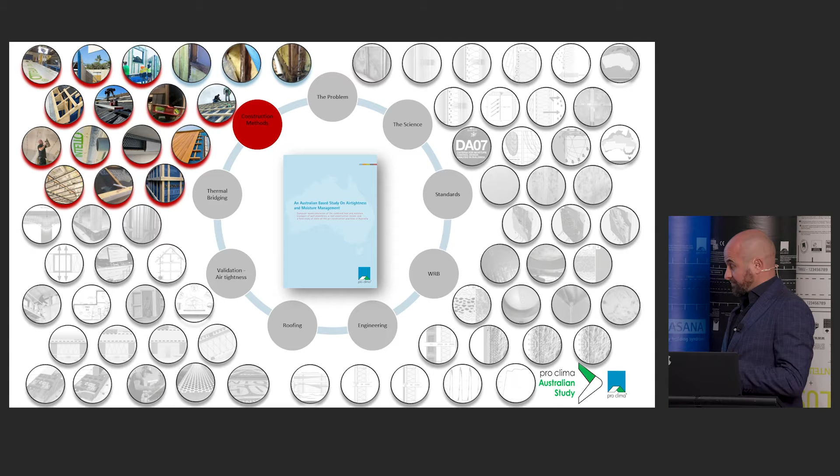It's very important to really understand the why. And the why is not just a single question or a single answer. So as we've now talked about the problems, the science behind the standards, what is a weather-resistive barrier, the engineering behind it, how does it apply in roofing, how important airtightness is, and also the thermal bridging, which is a very small part of the study, but it's also important.

We can talk for hours and hours about the why, but it doesn't help us if we don't know how to execute it, or if you don't have the right people to execute it. So very often we hear, is it even possible? It won't happen on site. The idea of the rest of the presentation is actually to prove that this is happening on site already, for many, many years, and that's the good part. All these following pictures, most of them are from social media, from premium builders. A few of them are here tonight, and you're going to see what they're actually doing out there.

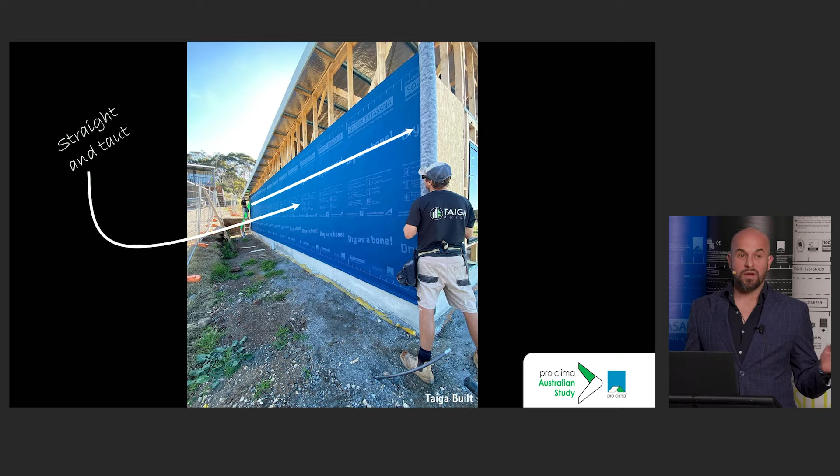To follow the line of how you build a house, I'd say we start with walls. And as we said before, if you use a quality product or a quality wall membrane, you just run the wall membrane and it should be right, isn't it? If you install it nice and taut. Because the quality of the membrane is actually what you need.

So job done. Or if you look a little bit more into the detail, we've actually fixed things because we have to hold the membrane in place. So in the first 10 seconds, you already start to penetrate the membrane. You actually have to consider what's happening with all the staples in the membrane. So if you have wind pressure on the membrane, you stress the staple connection.

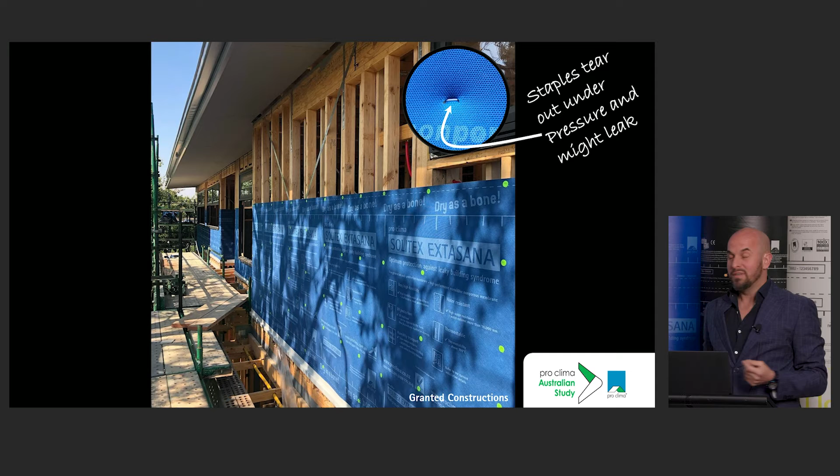So is this the best result? How do you fix your membranes? A better way is definitely using stinger washers. But still you penetrate the membrane. So every penetration is a potential hole under some conditions.

And the same is with brick ties. If you have brick ties specifically, they have these sharp corners. They would easily just penetrate the membrane over time because you have the wind pressure, positive and negative. That's why you see we have the Naideck tape, butyl tape, in behind to protect the membrane.

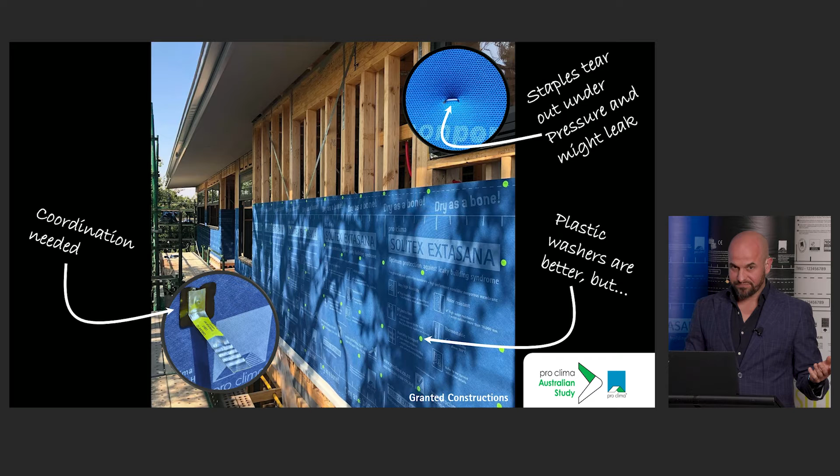I definitely would say there's a better way to install it. The idea is just to simplify it. Just put battens on top.

And as you know, thanks to Jesse now, we actually always want a drained and ventilated system on the roof and on the wall. It also has the benefit of supporting the structure and strengthening it. Because when you have wind pressure hitting the membrane, that creates stress on the membrane. So you don't want the staples to handle the stress, you actually want the battens to handle the stress. If you have brick ties, just fix in front of it and you don't have all the problems with sharp corners.

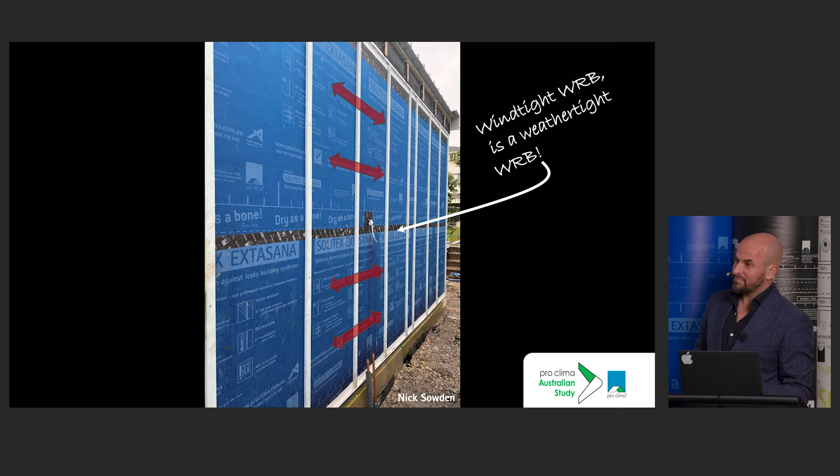So as we now know, we actually want to support the membrane. You also need a drainage layer, because if water gets behind the cladding, or if you have condensation, you need a drainage layer. But you just need 2 millimeters for a proper drainage layer, because that's all you need to break the surface tension of the drop. But 2 millimeters is not a lot, maybe you fold up a newspaper 3 times and you've got your 2 millimeters. So it doesn't sound quite right to me.

So it's not just all about drainage, it's also about ventilation. And to actually create a proper ventilation layer, you need something around 20 millimeters to allow free airflow.

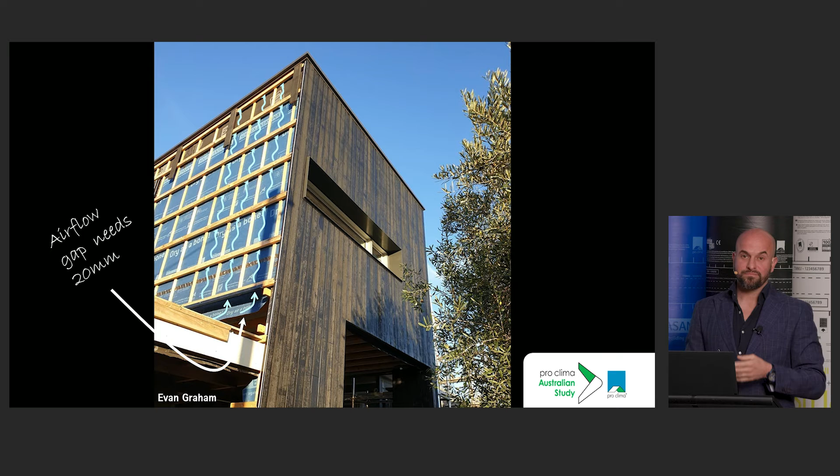So let's talk about ventilation in walls. An important part is, first, air has to get in. Where air gets in, water will get out, of course. So it means you need a proper opening on the bottom. Based on a study from BRANZ and Lund University, they actually want to have at least 10,000 millimeters square per linear meter.

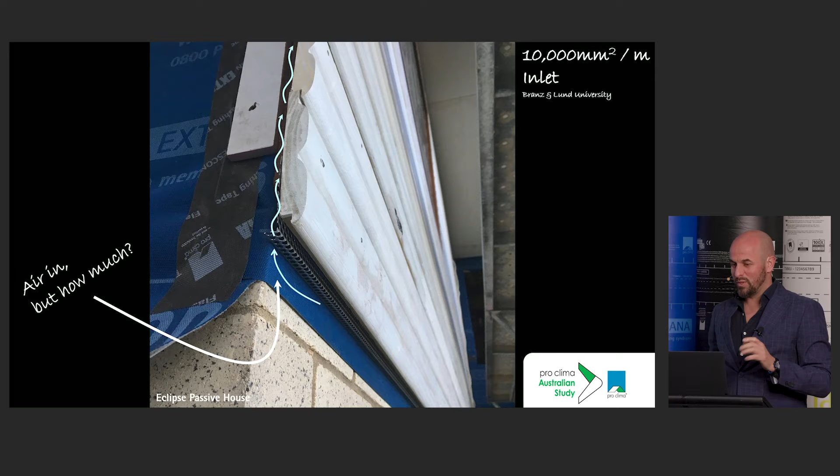But this is actually just 10 millimeters, isn't it? And just before that, 20 millimeters. It doesn't add up, that's weird. Let's have a look why. The thing is, if air gets in, air has to get out too. So again, we want at least 10,000 millimeters square per linear meter for air to escape.

The opening will change again if you go into bushfire zones, because then the mesh has to get finer, since the opening rate should be less than 2 millimeters. But you still have the same system.

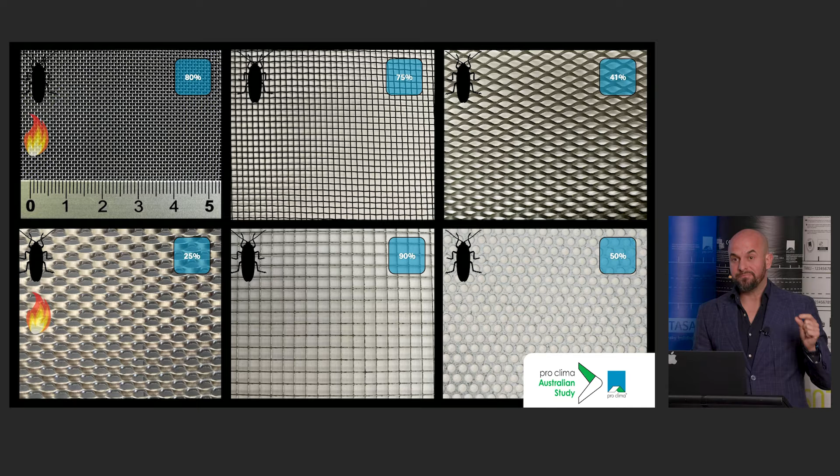One way to do it is using the flexible mesh. The tricky part is that the mesh is flexible, and the membrane behind is flexible too, so you might end up with a gap.

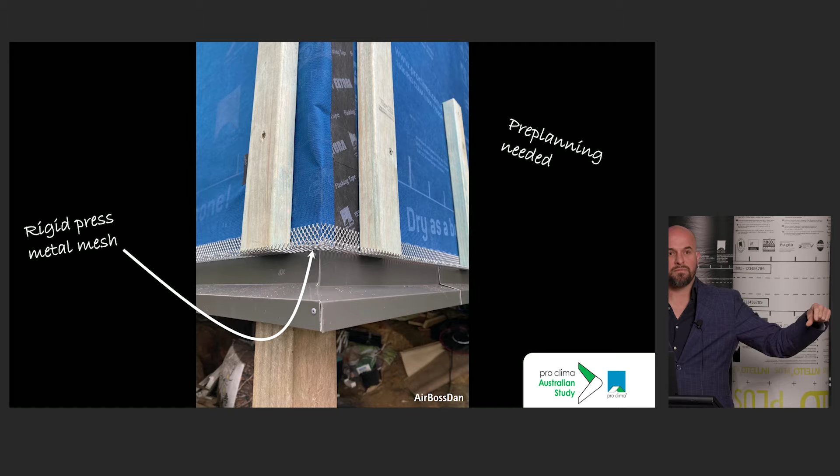I think the better version is actually a rigid, banded, custom-made cavity closer. If you have fire requirements, you just put a thin strip of fine mesh inside, but you still have something rigid. I think this is going to be significantly more durable than a flexible membrane.

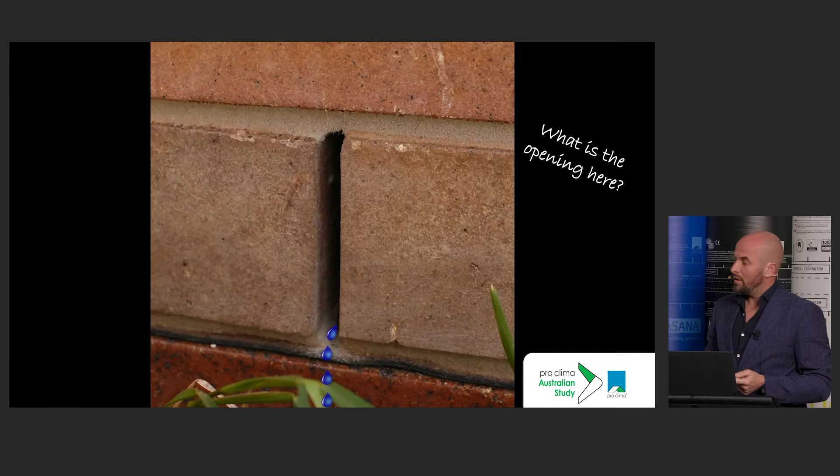Having a drained and ventilated system isn't just important for systems with cladding on the outside, it's also important for brick veneers. With brick veneers we just care about the weep holes, but don't even consider ventilation. I think it's actually important to have proper ventilation, not just drainage.

So we have to look into the detail to see what the actual opening rate is. I'll try to calculate the opening rate of one weep hole, which is roughly 760 millimeters square per linear meter, which is roughly just a thirteenth of what we want if you have weep holes every fourth brick, which is standard.

So if you introduced weep holes in every single brick, you'd still be quite far from a proper ventilated area of 10,000 millimeters. You'd only end up with roughly a third of it. So maybe the only way to achieve this is introducing ventibricks.

Quick picture, yeah.

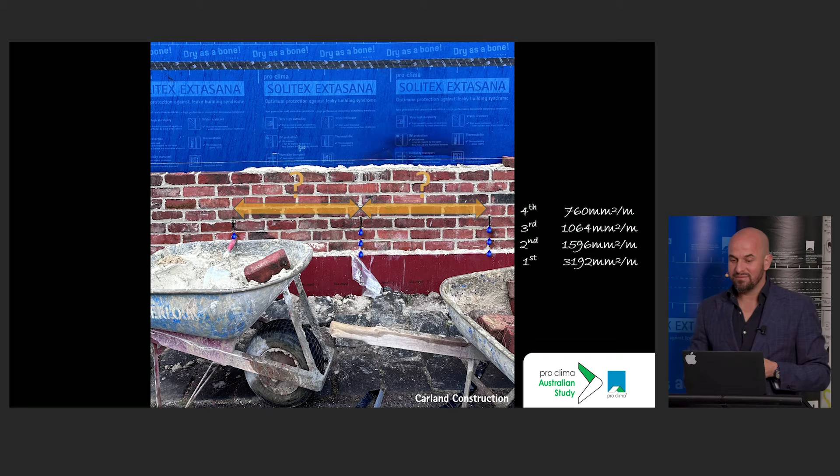What's happening with wind pressure is what we want to talk about, because it doesn't matter if you have a brick veneer building or a standard build with timber cladding or FC sheets, you always have wind hitting the building - we just have to look outside the window today. But what's happening with the wind? Do the bricks hold the wind back, or is the wind pressure actually being held back by the membrane? It's actually the membrane, so the membrane has to live with all the stress.

What's happening when we go into high wind zones up north? This building is in Ballina, for example, so they have really massive wind loads. In this case, you might need a solid board because you actually need to distribute the stress and power of the wind. In this case, you'd also introduce a peel and stick membrane, because this makes the system significantly stronger. In this particular case, it's also an airtight layer.

So they have 90 millimeters of insulation between the studs. Now the important part is they have an additional 60 millimeters on the studs, because now the airtight layer is relatively in the middle. But this only works with the hydrothermal analysis using WUFI.

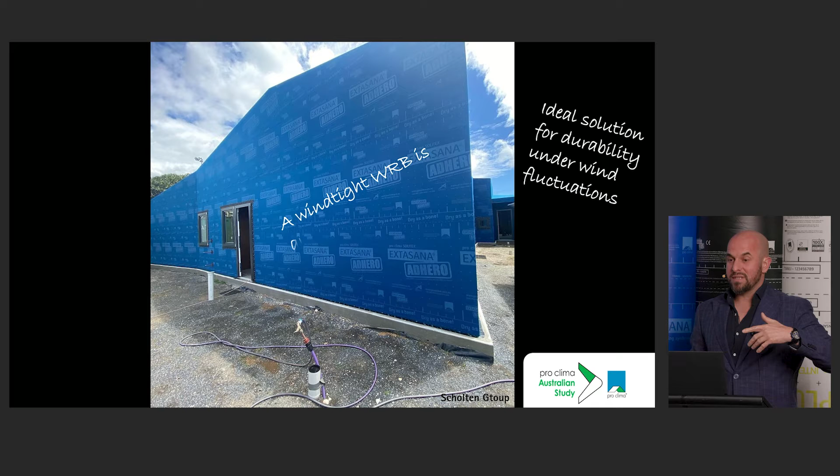Also, using peel and stick membranes, a positive side effect is you always get very good airtightness. I think that might be the best airtightness result we have so far in Australia, with 0.08. I think it's pretty good.

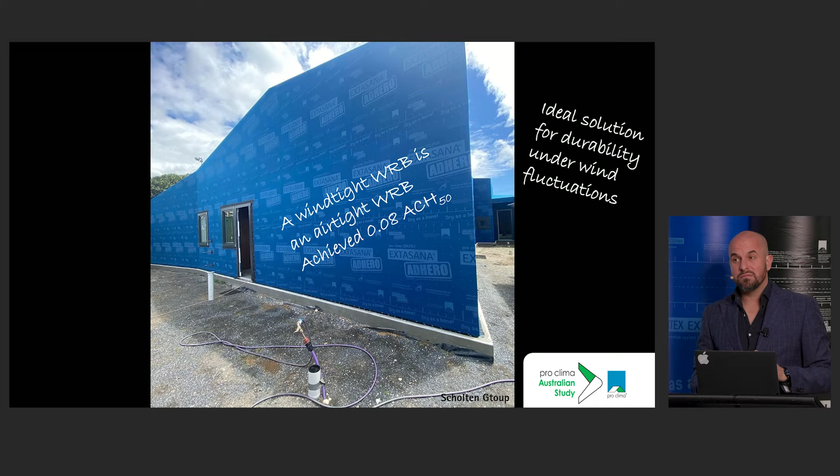I think it's a very good system for walls, and I guess also for roofs, because for roofs we know you have the bracing strips which might penetrate the membrane. So having a sheeting board on the roof with the peel and stick membrane, the bracing of the roof is definitely superior. And it's much safer to work on too.

But whenever you use solid boards, having this drained layer is significantly more important than normal, because you don't have any flexibility - so you can't hope to have accidental drainage layers.

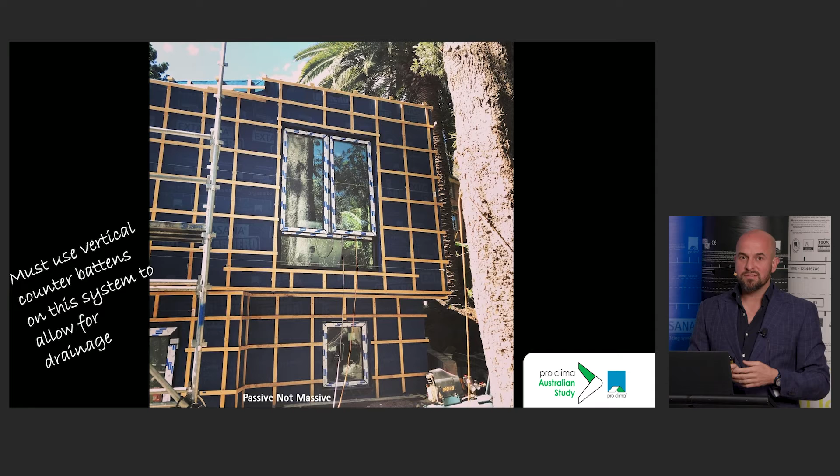The wall wrap is always perfect if you try hard, or the wall membrane is just as perfect until you start penetrating it. One of the most common penetrations are actually cables.

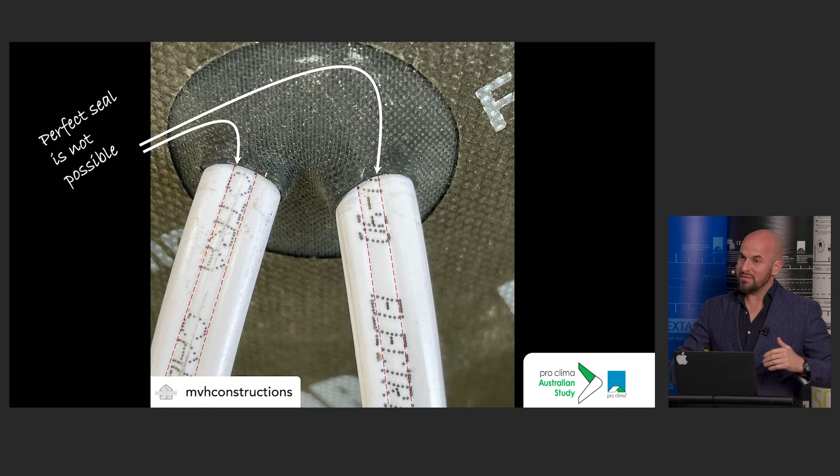So we have these nice grommets for cables. The only tricky part is that in Australia and New Zealand we have flat cables, while the rest of the world has round cables. These grommets are actually made for round cables, so if you look into detail, you can see the corrugations of the cables. It's going to be very hard to stick the tape in between, so getting 100% seal on this system is definitely not possible.

One step better is actually using taped systems, but you have to be very careful and passionate about sticking the tape properly together, because you always stress the tape a little bit. So I still wouldn't say that's the best solution we have.

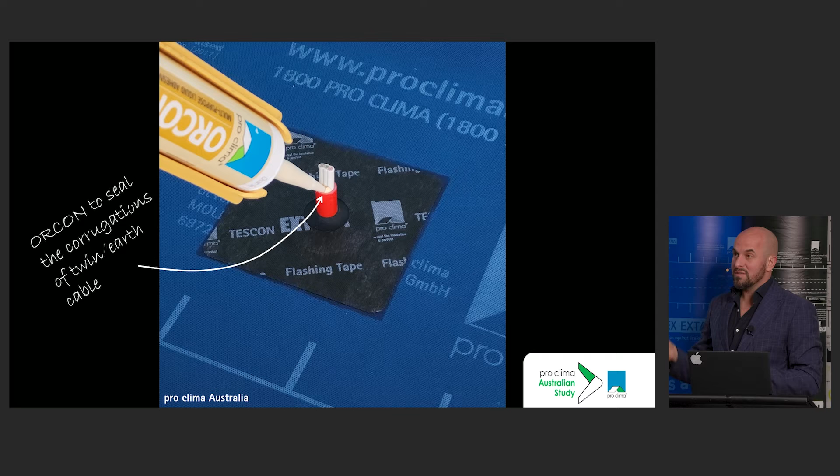I think the best solution is actually using conduits. Having pipe offcuts and a grommet, you run your cable through the conduit, giving you maximum flexibility while you build your building site. When you're finished, you just fill it up with Orcon, the liquid adhesive, and then you have an absolutely tight system. It doesn't matter if it's about air tightness or weather tightness - it's much better than running cables through your structure, in my opinion.

And the same with data cables - you don't want to have data cables running around the building site during construction because they're expensive. So I think the perfect seal is actually possible.

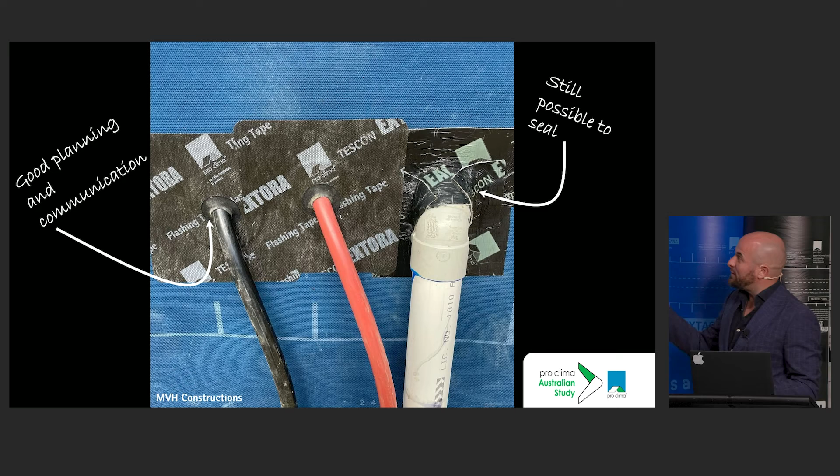But we don't just have cables, we also have pipes - should have drunk more water before. So use grommets for the pipes, which gives you all the flexibility too.

But there are also ways if, for example, you accidentally miss the grommet or can't use it for any reason - that's why we recommend definitely using a stretchy tape. It's not the best solution, but I'm just saying it's possible - at least do it before you don't do it. The use of grommets is very important because if you try to stretch tape around pipes, they're always going to shrink back because there's a lot of stress on the tape. So that's why grommets are significantly important to make the systems work inside as outside.

I think this is one of the easier penetrations because a big topic is always windows, and there's a big history about windows that fail and leak. So let's talk about the history a little bit. One of the weak points is always the window sill, because water will sit on the window and it starts to rot away.

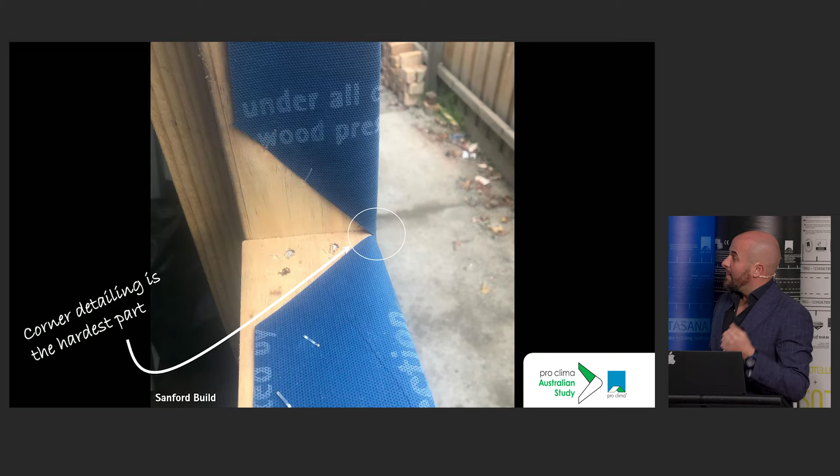So first of all, you always try to protect the window sill - that's why these specific sill tapes are there to protect it. If you ever had condensation, standing water, or a badly installed window, water would get into your structure - but it wouldn't sit on the window and the timber, it would sit on the window sill, because this is absolutely watertight and vapor tight.

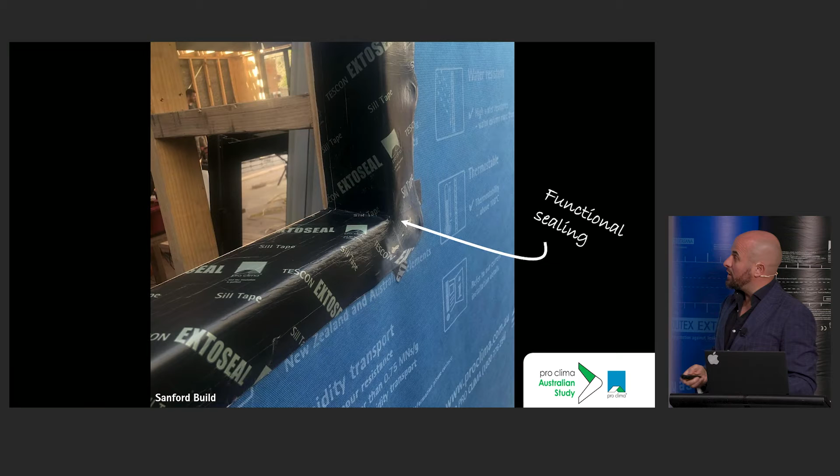You stretch it around corners, so it's definitely a better way to stretch around the corner than to tape it, because you minimize the risk of any water ingress in the corners. Also, the use of press fix is not a bad idea, because pressure activates the tapes and really works into the corners. So even the doggo here has a nice press fix.

Also important is how a window works, and that's why I scribbled this up last night - these are the principles of windows. When we talk about walls, we know we have a weather resistive layer on the outside, an air tightness layer on the inside, and insulation between.

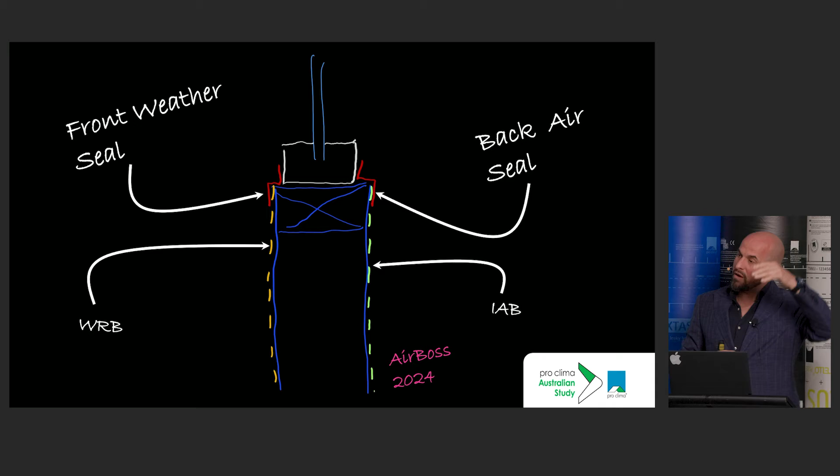The same is happening with the window install, just on a much smaller scale. So you have weather tightness on the outside to deflect water, but the back seal of the window is very important, because when you put a back seal on the window, it depressurizes the installation and the window becomes significantly more resistant to leaks. And of course, I would recommend filling it up with insulation or spray foam.

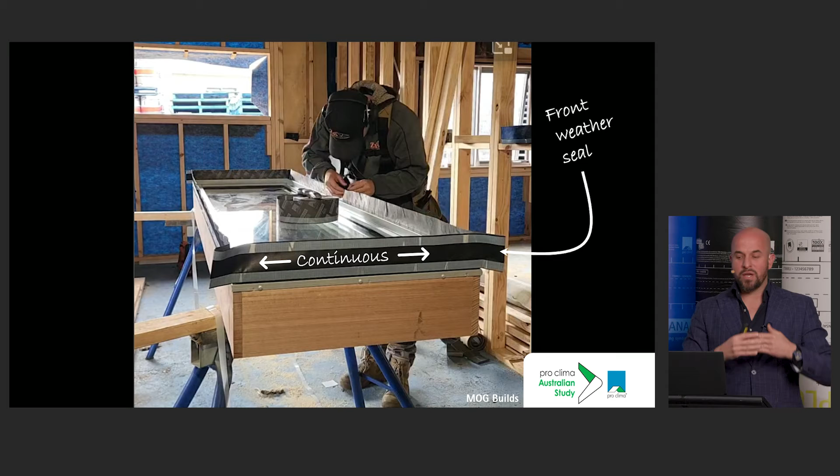Also important is the window install: the taping of the window should always be continuous all the way around. So when you pre-install the window, you see the tape going all the way around in one piece, and then you just join it together in one part. And the same applies on the inside. So you have one tape for the inside and one tape for the outside. The specific tape is a window installation tape.

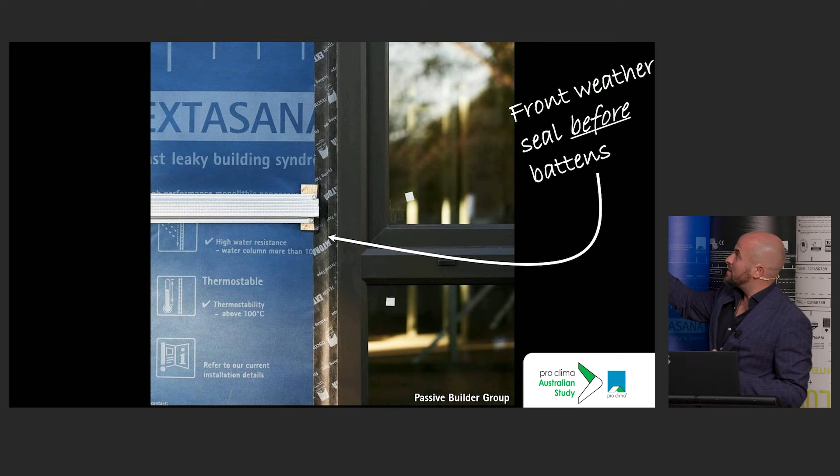You could also use standard tapes, but the sequencing will always define your outcome. For example, if you install the battens around your windows too close and beforehand, you'll make your life a little bit difficult when installing your window properly.

So that's why I'd recommend leaving the battens off, or leaving them shorter around the windows. Also with packers, we're not big fans of them, because the idea of counter battens is to have consistent support of the membrane, not just point fixings. Same here with the metal top hats on the outside. What's your thought here?

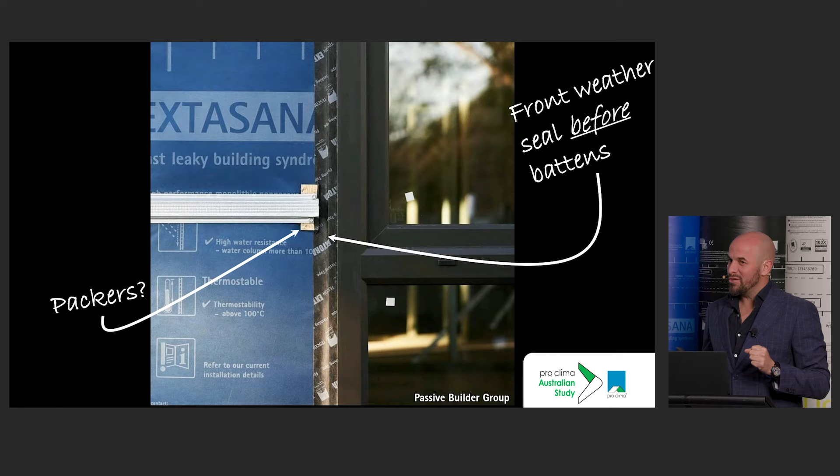Thermal bridging, yes or no? Trick question - no, it's not, because it's actually on the outside of the building. So, as with the packer, it's separated from the structure. It's actually no problem at all. I would have a problem if it were directly attached to the membrane. So that should be fine, in my opinion.

So that's why you keep your battens shorter around the windows - just screw them on, don't nail them, because if you want to remove them, you save a lot of time and trouble.

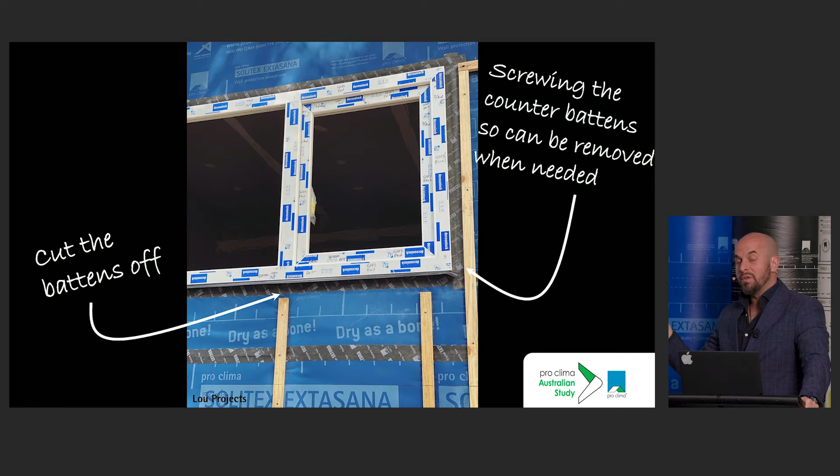Also, if you decide to pre-install your window before you wrap the walls, which isn't very common these days - I was hoping Hamish would come tonight and explain why he did it, but he just gave me a quick call. The reason is it's a hempcrete building, a hemp building, so that's why they had to pre-install it. So now we know, at least on the last day.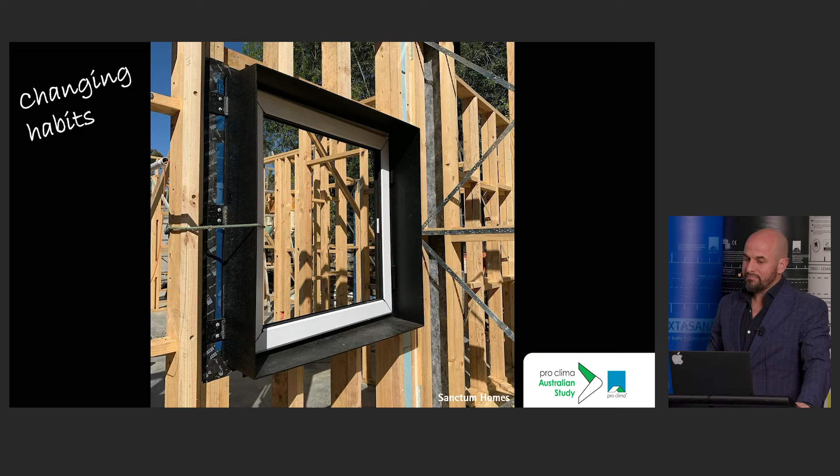So that's why, let's move on with time.

As for walls, we have a good understanding now. Now we have to think about the roof also, and it's always a big topic. The first thing is: can you actually install the roof membrane the old school way? 4200 part 2.

Technically, you can - technically, we can. You can actually drape our membranes over the purlins, but it's not what we recommend, because you want the best outcome for your roof.

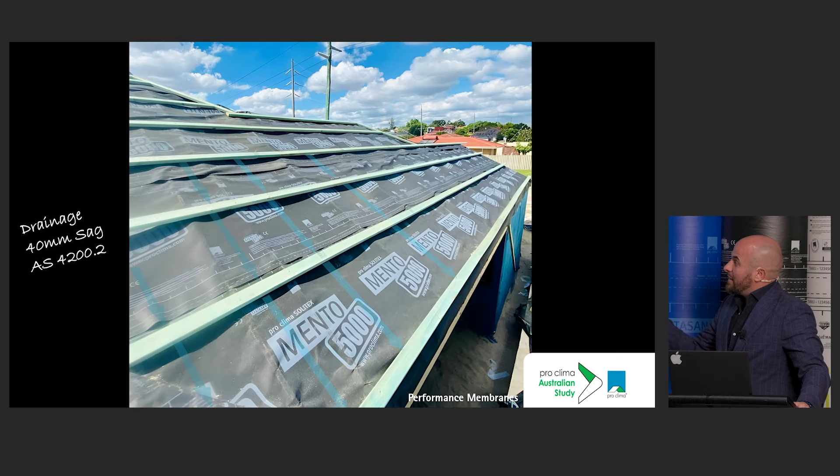The thing is, if you drape the membranes over the rafters, you might allow free water flow to the eave until it hits the ponding board. We all know the pictures when the membrane is meant to get into the guttering, and then you have these massive water pools in all the spots on the eave lining - and that's a bit of a difficult one.

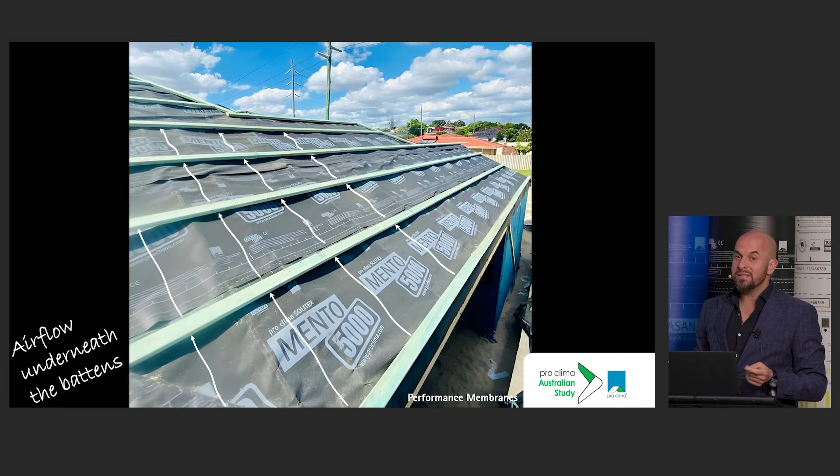It's also difficult because you really get a lot of accidental airflow in your roof system, and it's not a proper ventilation - it's just accidental airflow. That's the big difference here. That means you also minimize the performance of your insulation if you don't calculate it.

So that's why the better way is to have a nice and taut installed membrane - even better if you have a solid sheet to support it. Use membranes with an integrated tape because they make your life significantly easier. It's not the most comfortable idea to run around on your roof with a tape trying to tape it because the membrane is flexible - you're trying to balance on the roof, so it's better to make your life easier and safer. And as you tape the overlaps, you don't get any wind washing of your insulation.

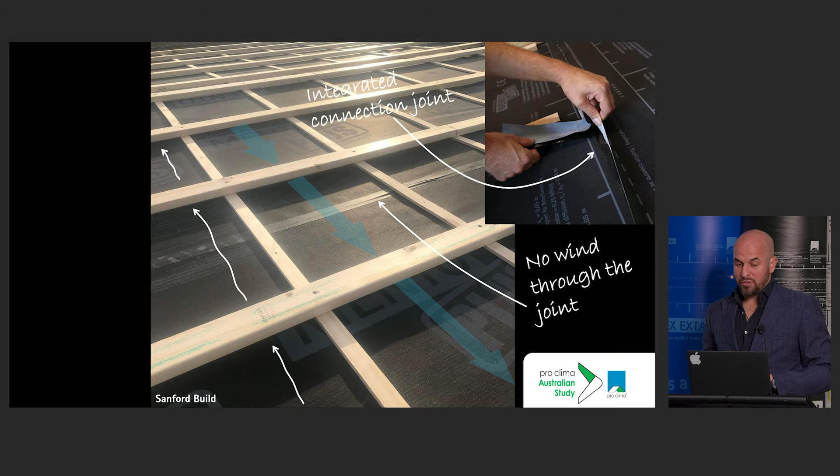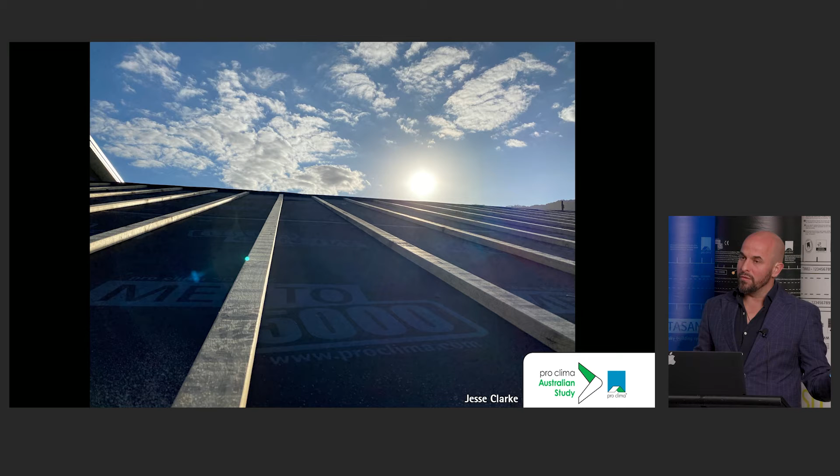Also important is, of course, you have to use materials and membranes on the roof which actually are UV resistant. This is because the UV intensity is significantly more on the roofs than on the walls. Just be aware that it's an important part of the system too.

For the best outcome, the installation method is significantly different also. So now we would actually install the membrane first, then counter battens, then battens. It means now you can't just run the roof up and down anymore. So in this case, you actually would work in sections or sequences. Install the membrane, put the counter battens on, purlins, and then you move on step by step. And I think it's quite effective too, because when you finish there, your roof is actually ready to be sheeted.

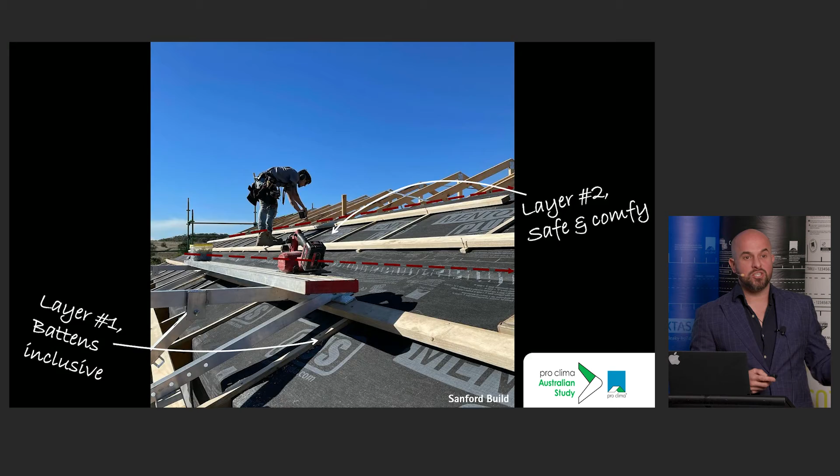Always the most important part, where I get the most questions, is actually about the wall and roof connections, because there's so many different ways how to do it. I'm not saying there's one way to do it right, but I think there are quite a few ways to do it right.

That's why wrapping your building like a Christmas present is definitely the best idea. You still have to tape around the rafters, but you don't have any airflow into your structure, and your building is completely wrapped. So that means water shouldn't get in here at all.

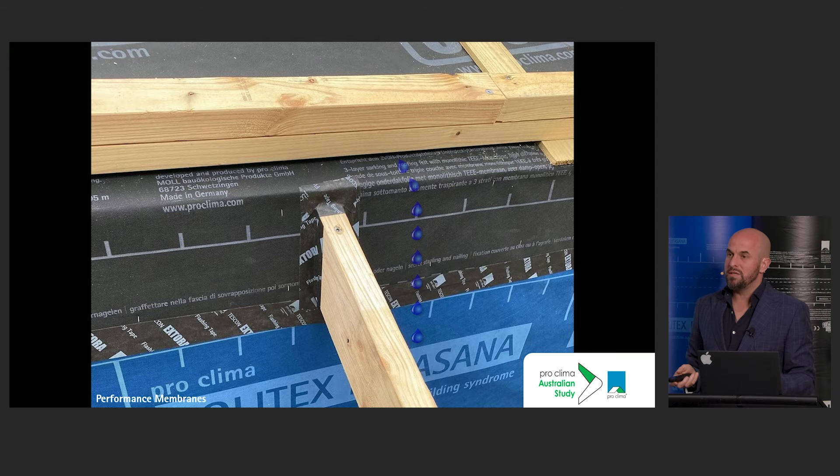Taping around the rafters can be quite time intense because you have more than 10 rafters normally - we talk about 60 to 80 rafters per house or rafter ends. So they all have to be taped. I just want to mention the counter batten here because this looks to me like 5mm counter battens. That's definitely not a proper ventilation layer. So just having a bit more would be definitely beneficial.

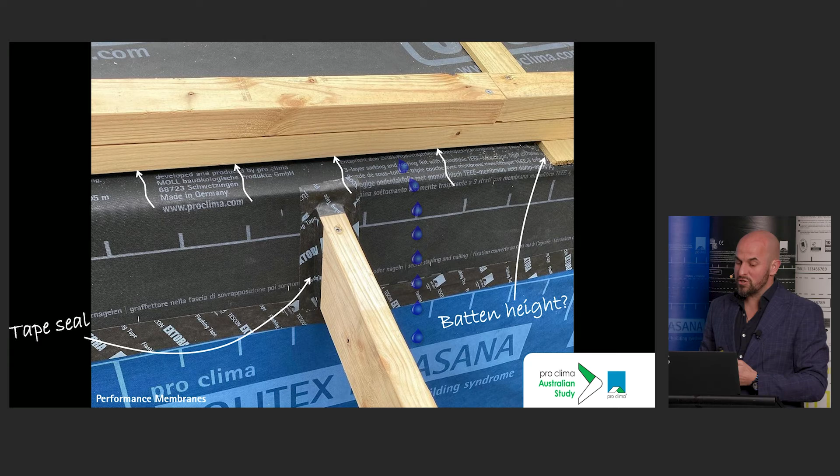So how do you cut down on taping around the rafters? I used my gray brain cells over the last year or two, and I think I came up with a solution where we can save a lot of time. We don't actually have to tape around the rafters anymore - you can actually staple it on and then spray around. You can maybe seal 100 rafters in maybe 2 hours. So I think it's going to be significantly faster than carefully taping around it, because I know there are a lot of people who really go to tape perfect. It's going to be much faster.

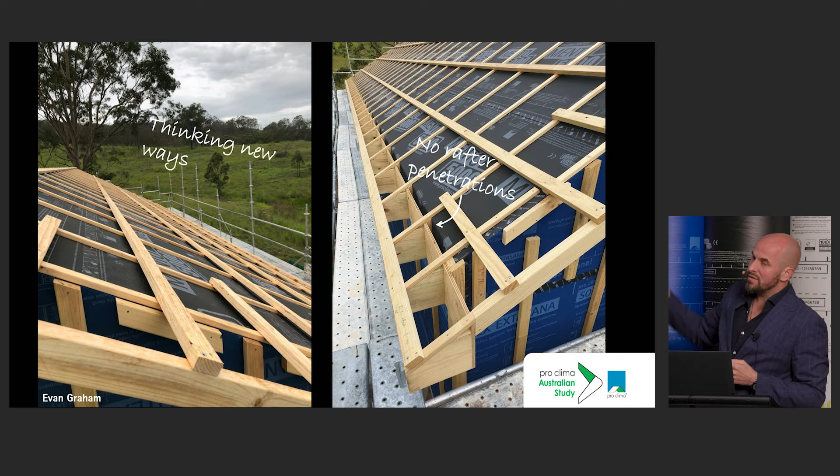Or you just completely avoid having any penetrations to your layer and think way out of the box like Evan in Newcastle. He's actually wrapping his building like a Christmas present, and doesn't matter what overhangs he'd like to have, like here on the eave or on the gable, he just adds them on. So for example, the eave lining is actually pre-made in his factory - he just comes on site, screws them on, 2 hours later, done. The gable overhang is just made with the purlins from the roof. And you see the detailing around is so simple. So you save a lot of time if you have the chance to follow this system.

But also, it's quite important to really consider how we actually ventilate and drain the eave.

One way is, what I see once in a while, you actually stick the membrane on your metal fascia. Just be careful, because these membranes are not designed - no membrane actually is designed to be permanently exposed to the sun. And very often you look around buildings and you see the foil draping into the gutter. It works for a few weeks, months, and then the sun will definitely disintegrate the product and there won't be nothing left. So when you follow the system, it's important that you really pull it taut on the bottom part so you don't end up with a pond.

You also could actually preload the membrane behind the gutter system. In this case, you would drain and ventilate the whole roof structure behind the fascia board. That's definitely the better way to do it, because very often I get the question about draining it into the guttering. It's quite a German approach that we want to see how much condensation is actually coming out from the roof, because if there's more than just condensation, then it's actually a water leak. You want to know that.

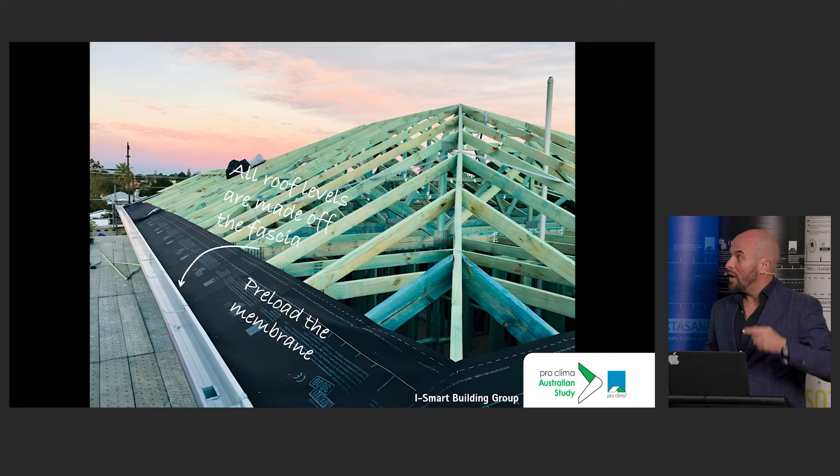Also, when detailing the eave lining, I think it's best to separate the gutter system from the drained and ventilated system. If you have a double fascia, you'll see there's a lot of air getting in, completely separated, and you can always choose the perfect height for your gutter, no matter what gutter you're using.

Another one, one of my projects. You have a lot of battens here because this is going to be a slate roof. What I did on my projects, even back in Germany, I always had custom-made flashings as a trap flashing, because whenever you have water coming through, you don't want it to end up in timber, FC sheet, whatever.

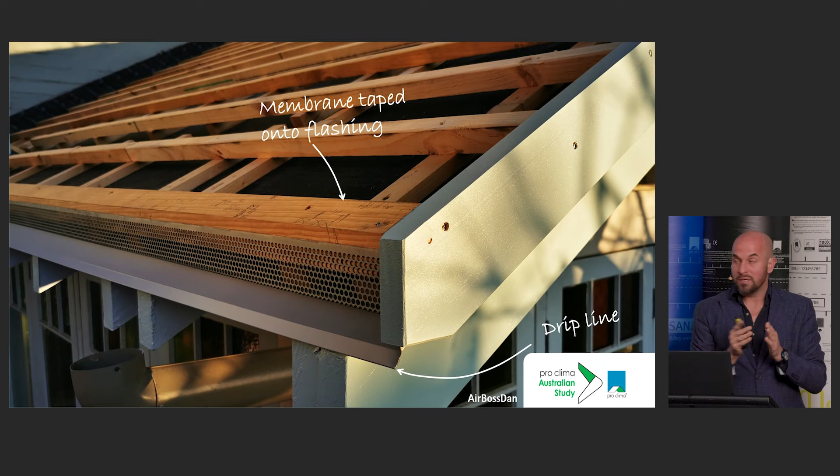That's what I said before - you always have water pools and water spots on your eave lining, and that's not nice to have. So I always want a dedicated dripping edge, and I stick the roof membrane on top so you create a natural overlap. Then you have this ventilation layer, which is separated from the front part of your first purlin, and then you just put your fascia board in front of it, and you have a really nice system.

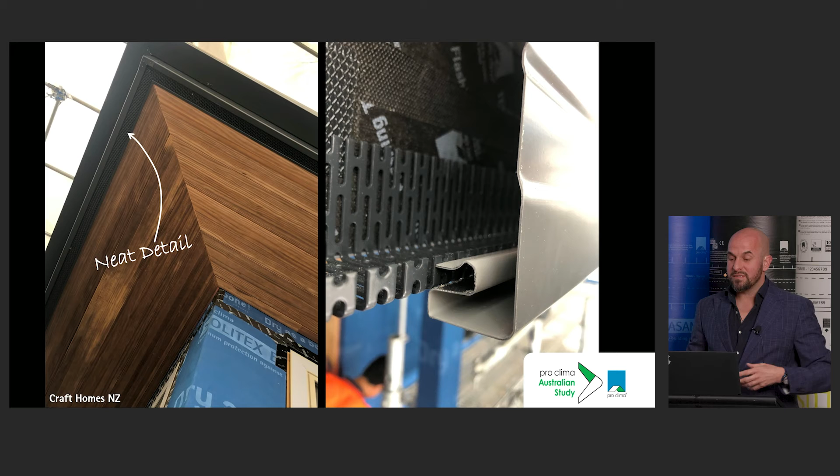It looks very slim and nice too - that's another way how to do it. There's also a more architectural approach from New Zealand, which looks nice if it fits your house. What I'm trying to prove here is there are many, many ways how to do it. I just care about getting enough air in and getting water out properly.

You'll also find most of these pictures in the study too, so you know.

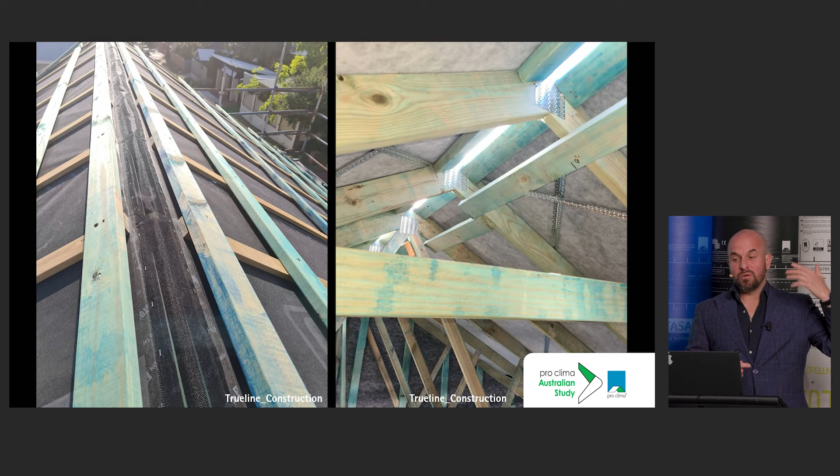As we have the eave lining, what's happening at the ridge, because air has to get out at some point. On the left picture, the mesh is purely for vermin protection, nothing else. On the right picture, under certain conditions, you actually need to ventilate your truss roof, which we'll talk about in a second - roof trusses actually have to be ventilated by code. That's why when you have a skillion roof or rafter roof, you're able to really wrap your whole building, because you don't have to ventilate your truss in that case. The ridge detail is significantly tighter than if you have to organize some overlaps.

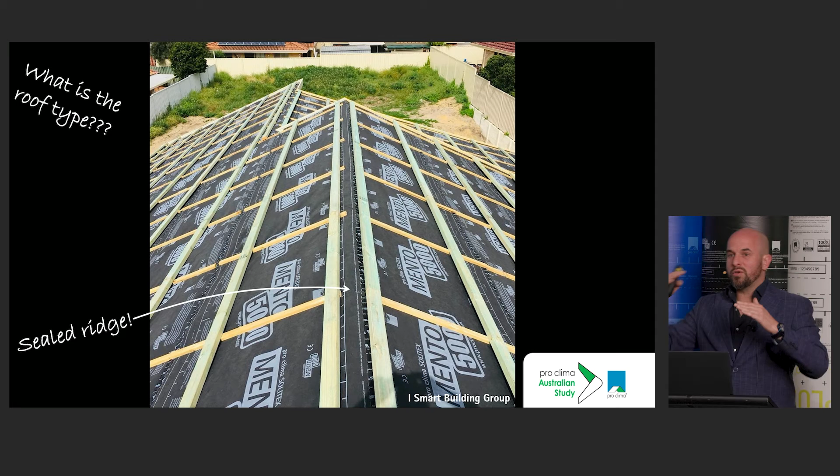I think the ridge is the easy part, but when we talk about hips and valleys, specifically valleys, there's a lot happening there. First of all, you have to be careful to really leave the valley open so water can properly drain out, because you have to drain so many different voids of your roof. If you block that up, you definitely get stagnant water on your roof, and air also has to get in. With the valley line, you have to feed, in this case, around 8 to 10 roof voids because you want air to get in. That's why the clearance in the middle of the valley is very important.

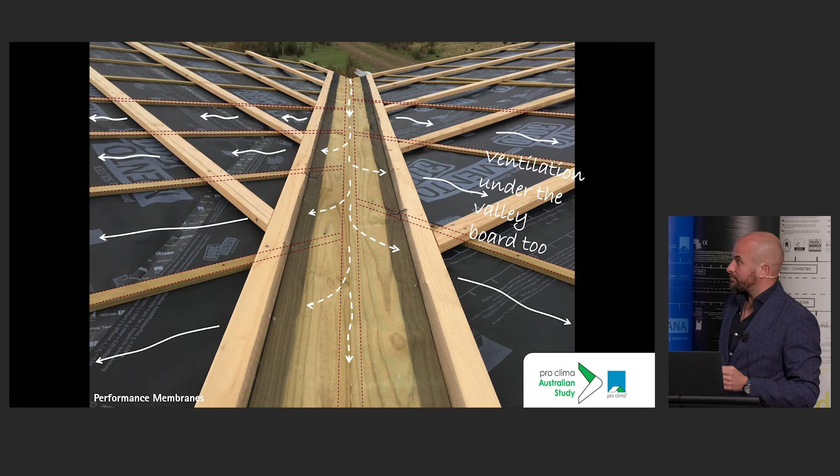And my favorite, when we talk about roofing features, specifically skylights, because everyone likes to have skylights - I think I've installed maybe 200 to 300 in my life.

That's why I call myself an experienced skylight installer. One of the experiences I've had quite a few times is missing the internal gutter above the skylight. It's very important, doesn't matter if it's condensation or whatever, you have to deflect it, because over time - we're talking 10, 20 years plus - this can actually fail. So the integrated gutter is significantly important.

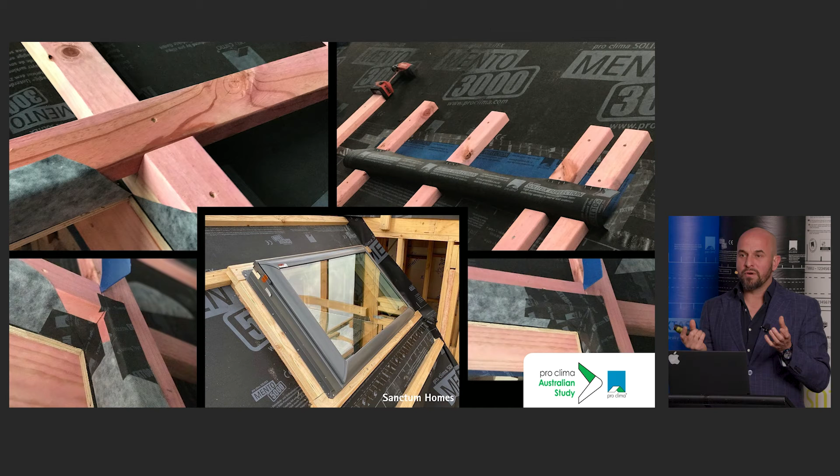Also important, there are two different types of skylights, specifically the Velux ones. There are the US type ones and then the ones from Germany, from Europe, and the performance is significantly different. The US ones are going to act a little bit like a thermal bridge because they sit out of the roof a lot. The European ones sit very deep in the roof and have insulated frames. So it's interesting to know there are two different types.

But if you use the US style like here, you definitely have to wrap it like a normal window - wrap it around all the way up and tape all the corners. After you've taped all the corners, then you can install the window on top, and then tape it properly. Otherwise you don't have a continuous connection from the window to the WRB layer on the roof. As I said, the internal guttering on the roof is very, very important - I've had to fix way too many, so that's why it's important.

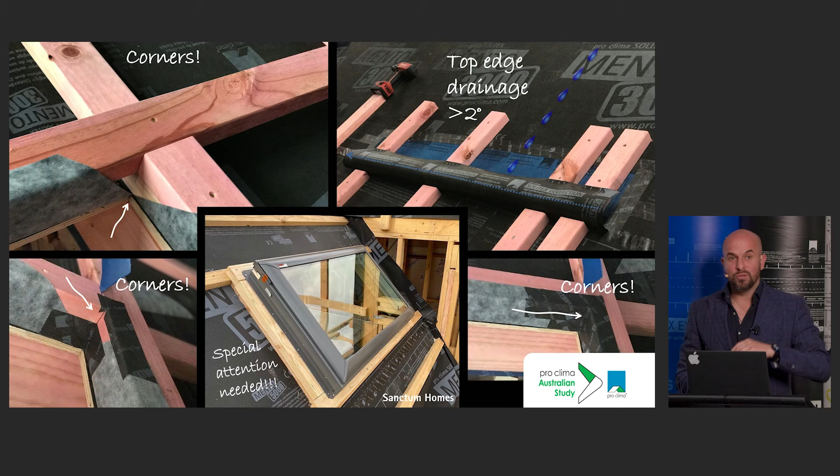Also a feature, as Jesse mentioned before, to protect the view of the harbor or the ocean, or maybe just a few kangaroos passing by your building - it's actually a flat roof. So if you have a flat roof, there's a specific system.

The important part of the system in this case is to prime the overlaps, because the roof pitch is so low that water is going to take a while to drain off. If you have a bit of wind pressure, you can have standing water on the roof potentially, and that's why you have to stop the capillary action from going back. Also really press-activate, use the press fix again to have no wrinkles - that's very, very important.

As I think it's a relatively easy part now to install the external part of the building - so what's happening on the inside? Is it different? Is it more difficult?

Because a lot of people are actually a bit afraid of airtightness. And the answer is no, it's actually not. The installation methods, the details are technically all the same. So the first time you install an intelligent air barrier on the inside, it's just as easy as it is on the outside.

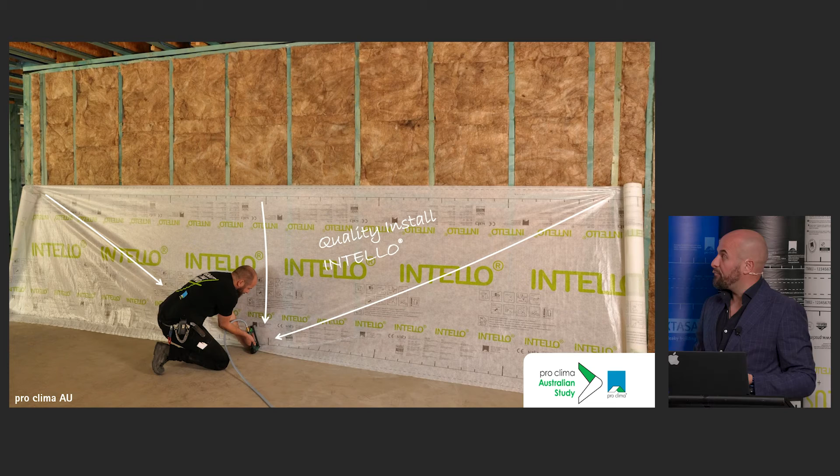Also important is, how do you start it? When do you start thinking about the airtightness layer? Should it be at the DA stage or when you plan? I would say at the latest, when you start framing, you should know what your details are.

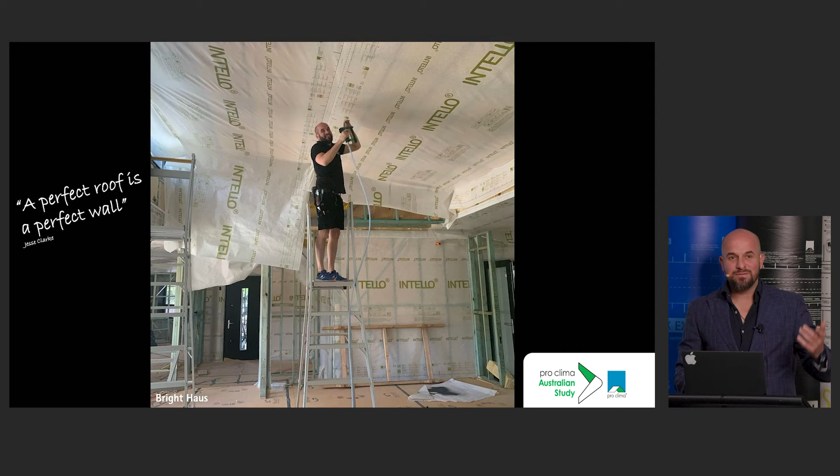But you actually have to pre-think what's happening on site, and like here, it means you have to pre-install air tightness strips on the way - we call them connection strips. You have to install the connection strips during the construction phase and during the framing stage, because otherwise you're going to introduce a lot of work trying to fix it.

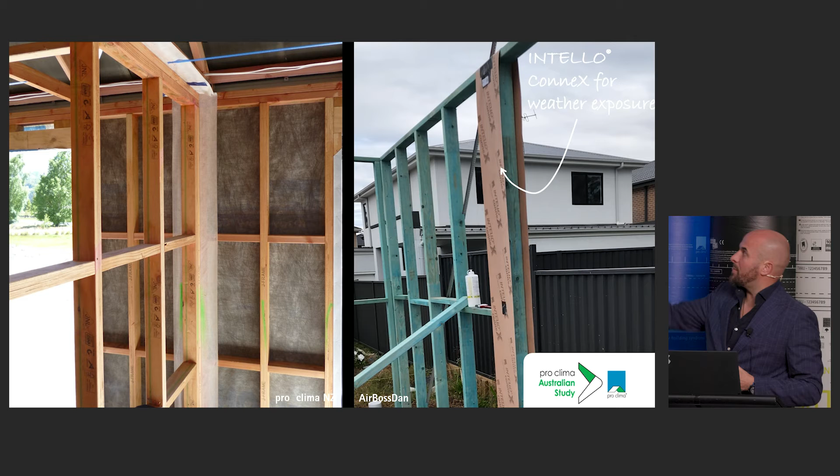Also, it's important to use the right product, because if you expose an internal product to wind and weather, you can't actually do it - that's why there are specific products. We have specific products that are UV resistant and weather resistant. This is how it looks - it's still the old product, but you just wrap it up and over the top plate, and then you create a continuous air tightness layer. But as you can see, because now you have to connect the internal air tightness layers to the connection strips, it can be quite time intensive.

What's more important and more expensive, the products or the workmanship? I think we all agree it's the workmanship. This is when we drive up the costs. So let's actually simplify the structure.

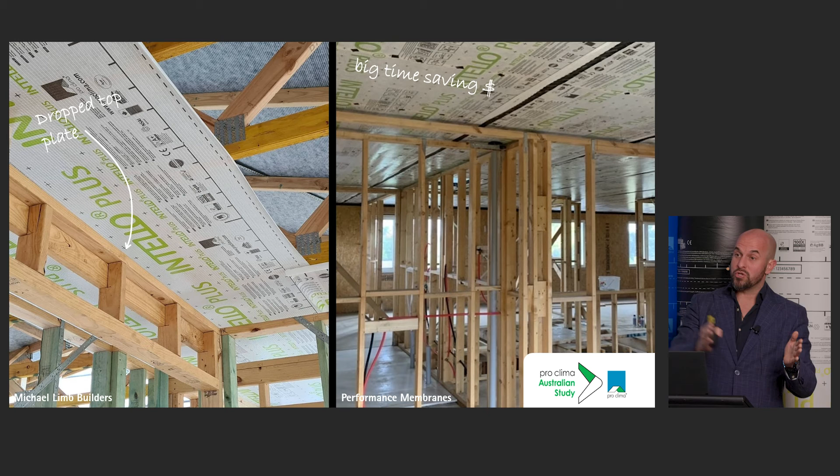You could save one or two weeks of labor at least if you just have the chance to avoid all these connection strips. One way would be to drop the ceiling to minimize the ceiling connection strips, or leave off the internal walls temporarily, or leave internal walls a bit shorter, like 600 millimeters, or use temporary fixings. If you use all these tips and tricks, you just cut down weeks and weeks of labor, and this is how you actually save money.

Also, how are you actually connected to the concrete slab? Do it once and do it right, because if you connect it properly to the concrete slab, you have a durable connection and you don't have to fix it over and over again during the construction phase. It's about durability here. How I say, primer is king.

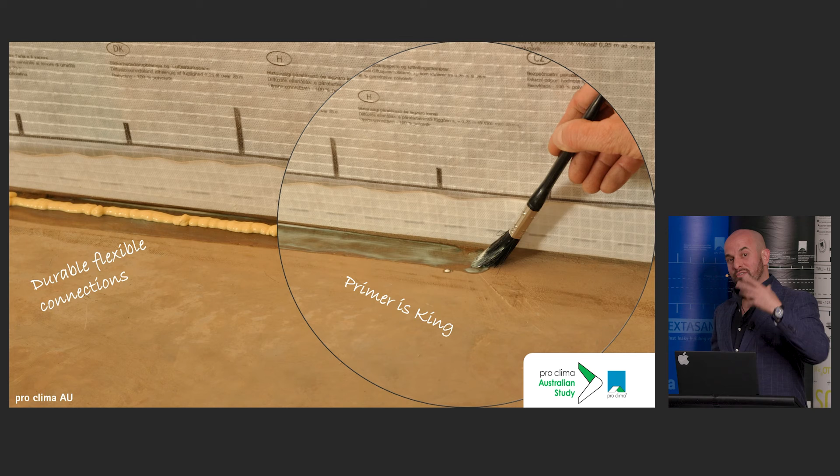But specifically in Australia, the way we build houses is definitely a little bit more architectural, because when you go through Germany, we just have square boxes with a gable roof, that's it. I definitely wouldn't say we have nice houses in Germany, but I can tell you they're effective and fast to build.

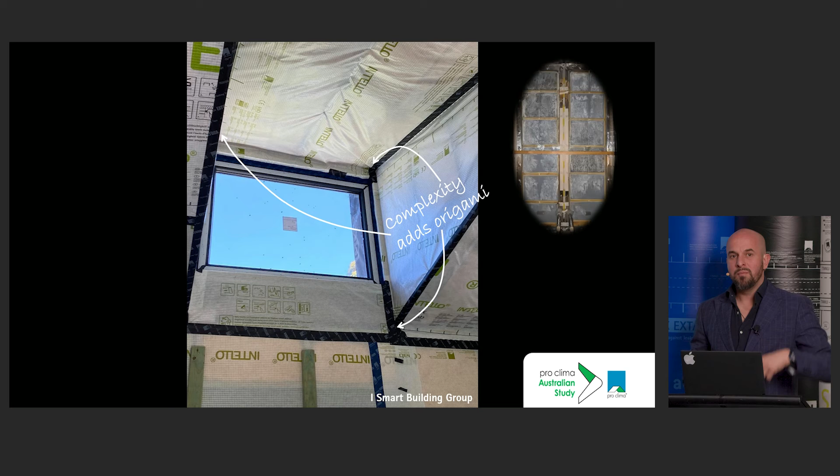So that's why it's important to understand all these potential problems. And that's why I like Jesse's little video there, because if you just have this one millimeter on the wrong conditions, this is what's happening. So whenever you introduce, as a designer or builder, architectural features, just be aware that you introduce extra time and need to put more attention into the detail. I'm not saying it's impossible, but just be aware you introduce extra time.

Next important part is services, how to actually run it. Simplify it: the easiest way is to always introduce a dedicated installation area of 35 to 45 millimeters. I know it's a big no-no for a lot of people because you lose floor space, but as we introduce more insulation, you could have a 90mm frame and just put insulation on top in your installation area. So you increase the R value of your whole structure, and you have a dedicated installation area where you run cables and pipes, because this is the best way to protect the membrane from damage.

Also, the Sparky loves it. On day one, the Sparky will come in and say, oh, I don't like it, it's so complicated. On day two, he's going to run around with a big smile on his face, because he's going to save a lot of time, since he doesn't have to drill a hundred million holes through the studs - he just runs the cables behind the counter batten or behind the installation batten.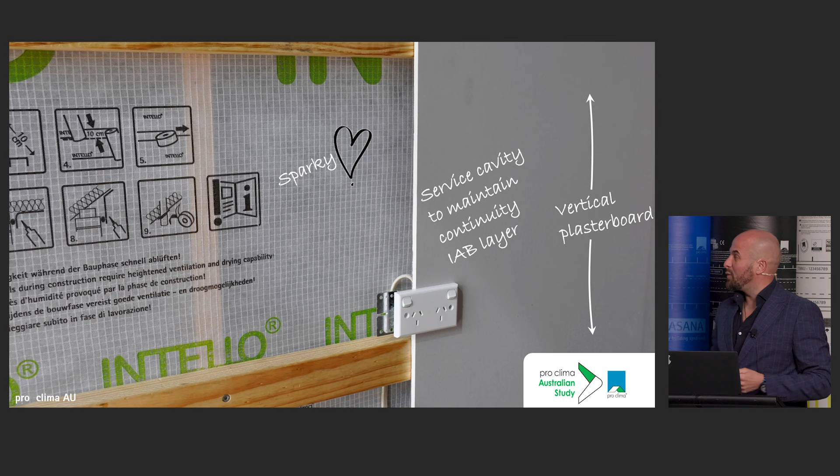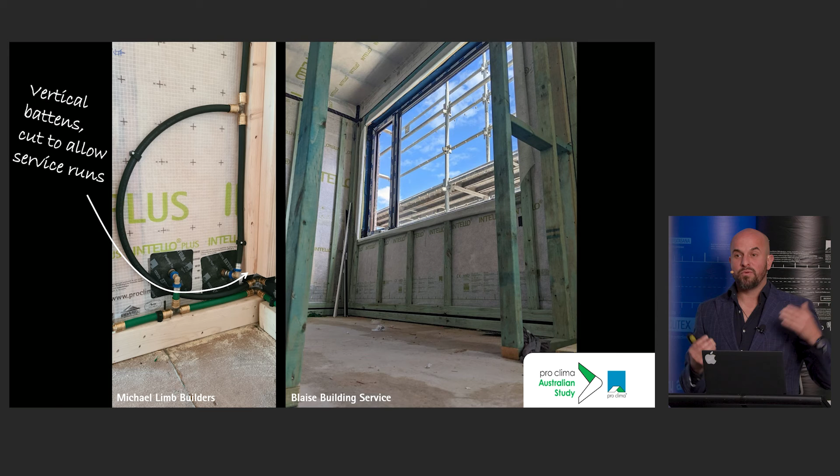This is typical, for example, when you have horizontal battens with a vertical install of plasterboard. It's a bit revolutionary in Australia to recommend vertical plasterboard installation because no one does it. So just turn it around and you still can use it - you just have to cut your battens shorter, because this is the best way to allow free space for your battens to run and your installations. It's quite important.

Ceiling services is a very interesting one, because I think that's always underestimated. When we talk about ceilings, we want to hold the membrane in place, but we also have to consider what's happening with the weight of the insulation. So the choice of insulation layer and its thickness is very, very important.

Still, a lot of people think that the blue strips, how we actually hold up the insulation, are holding the insulation in place. Everyone who installs the Intello layer on the ceiling knows, no, it doesn't really. So if you try to install the Intello properly, you actually have all the stress sitting on the membrane.

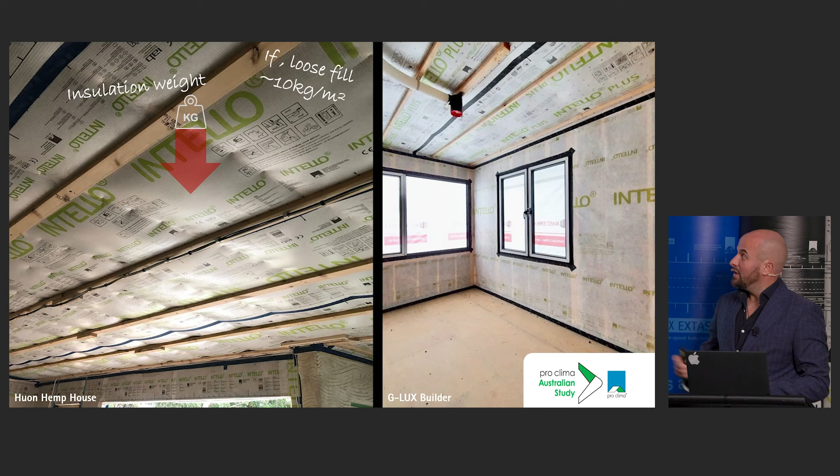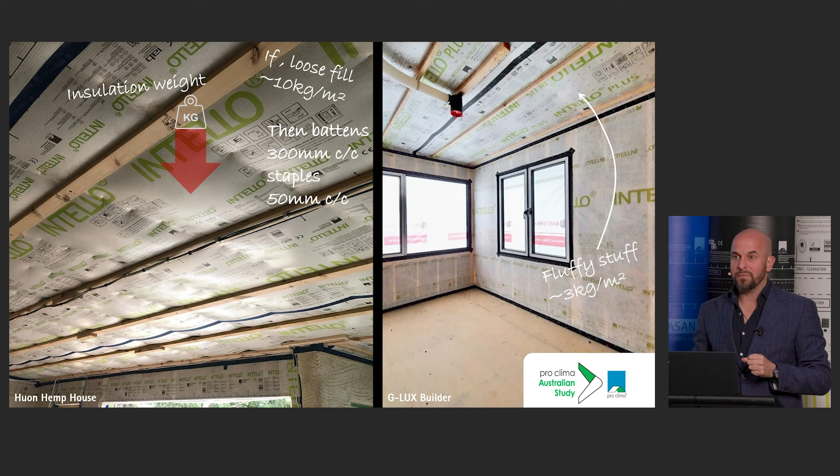If you now go to a high density insulation, like blowing in insulation, you still have to consider that the membrane actually has to hold all the load. That's why it's important to really follow all these steps. If you have blowing in insulation, where you have a high load sitting per square meter, you really have to increase the number of battens and the staples too. You need staples every 50 millimeters. Normally it's not a big problem with fluffy stuff, like on the right picture, but there you see just between the two battens there's just one staple. This can be difficult, because if you do a blowout test or whenever you have wind pressure, all the stress will sit on one staple. That's a lot of stress for one single staple. So in this case, maybe I would put a tape on top.

And that brings me to my next topic, roof trusses. It's a bit contradictory to energy efficiency because we always say we want to protect our insulation layer properly. Just trapped air is good insulation.

But we have a truss roof. Specifically when we look to Tassie and colder climate areas, we know we had massive issues with condensation with truss roofs. Because you have this massive air void of still standing air, you can't really calculate properly how much moisture you can accumulate before you have problems. Even if you don't have an intelligent air barrier, all the moisture might just rise up into your ceiling structure. That's why the building code requires you to ventilate your roof truss. There's a reason why in Europe we don't use roof trusses in resi builds. Because to make this work, you heat it or you actually ventilate it.

When we talk about ventilation in this case, we're not just talking about above sheeting ventilation, you actually have to properly ventilate the insulation layer. Which means, again, you reduce the performance of the insulation. So the system is, we'll say, between a rock and a hard place at the moment.

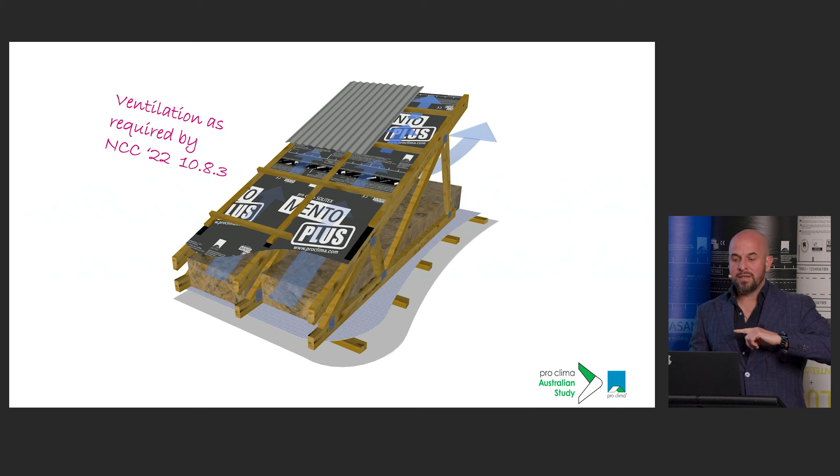As we now ventilate the roof space, who's handling the wind pressure, wind gusts hitting the building? It's actually not the WRB layer anymore. It's now the airtightness layer on the inside, the intelligent air barrier. So whenever you install a ceiling air barrier, you have to consider that it now has to handle the wind load too. That's why it's very important to properly secure it and follow the guidelines to get a proper install in this case.

Yeah, look, I forgot this comment. The roof is like a box of chocolates, one of Jesse's favorite comments, specifically around building science in Australia, isn't it?

So the ideal solution, as I said before, a smart person told me a perfect roof is like a perfect wall. Whenever you can, always try to have a rafter roof because this eliminates most of these problems.

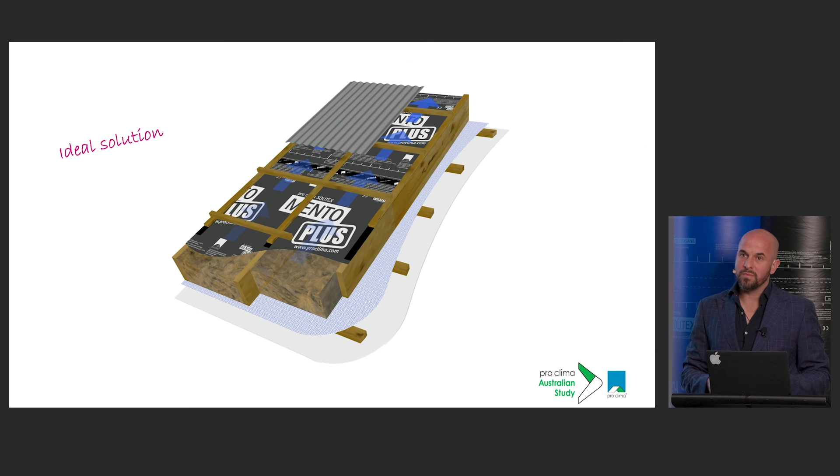As we now run all the battens through your systems, you have to talk about the fixings because most times, which is more of a passive house detail, you have a suspended ceiling because you want to run all your services and your ductings. I want you to fix them all on the battens and don't penetrate the membrane in this case.

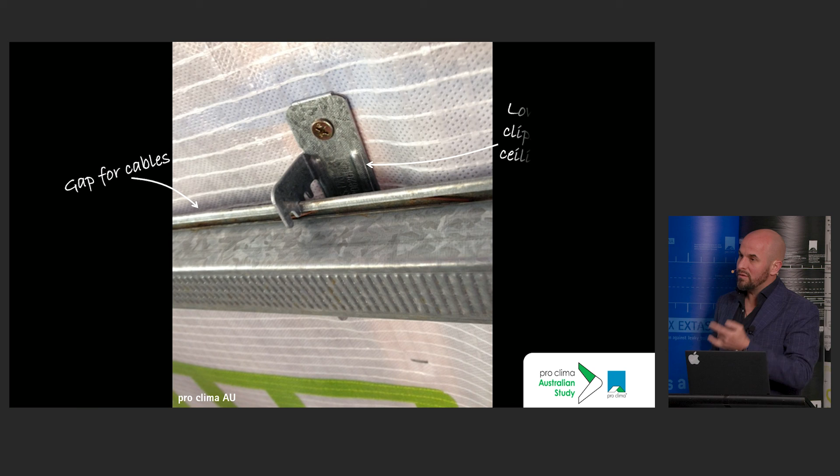When we talk about fixings and clip fixings, that's a tricky one because you have the sharp corners and you just have point fixings again. We always recommend having continuous support of the membranes, inside as outside. That's why this is, in my opinion, very tricky, because that's just a point fixing, not a continuous fixing at all.

And we talk about durability. So you might pass the first airtightness test, but you want to pass it in 20 years too, or 30 years.

You can run the battens on the ceiling in both directions. It's much easier if you run it crosswise because the installation layer is much easier. If you run it lengthwise with the purlins or your roof structure, then you may have to run the cables from above, or if you have direct plasterboard.

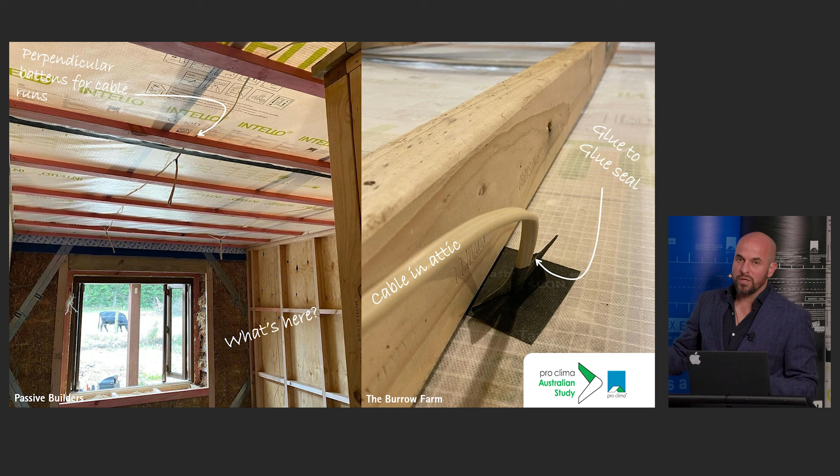That makes installing the cables and your services a little bit more difficult. Also I want to point out the purple cow in the corner - what's different in this picture is it's hempcrete, a hemp building. But I don't actually want to talk about the hemp.

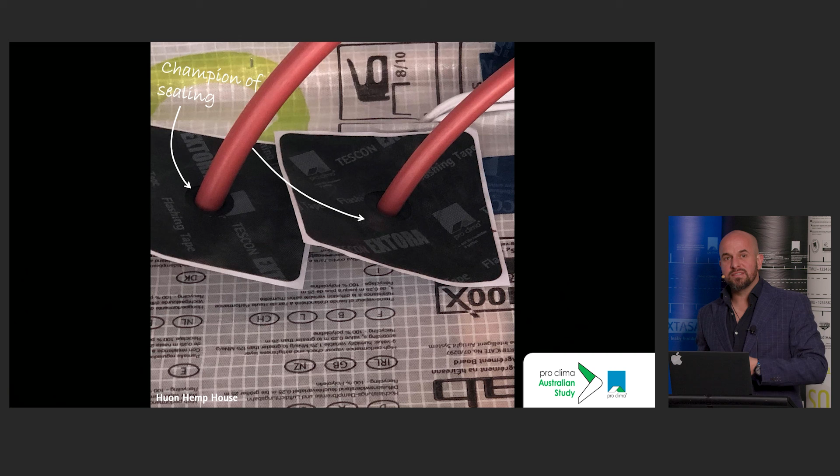Grommets, the same as always, inside as outside. Whenever you introduce structural or architectural features, even visible ones, just be aware - a lot of taping is needed.

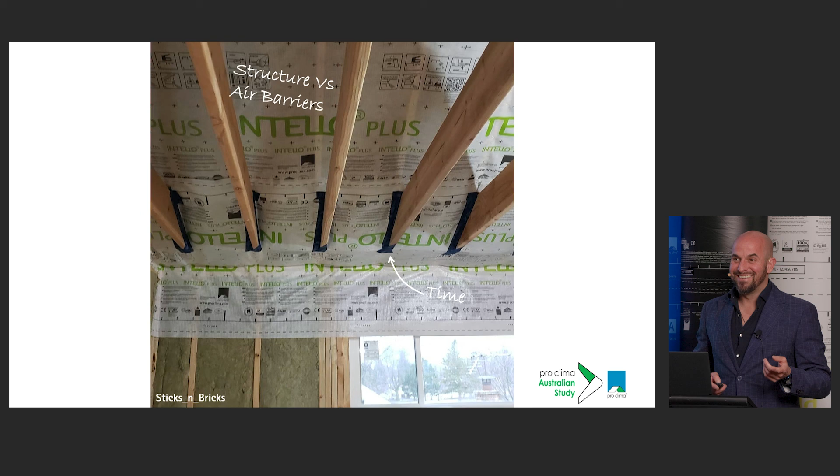The best way, specifically for new builds, to cut time and cut costs - and as we're all aware, mold problems are going to get a bigger and bigger issue because we have materials that are very mold sensitive. If you leave these materials exposed to wind and weather for weeks and months, chances of mold problems are very, very high. So what's the answer? You know it already - I'd say factory plant systems.

Over time we're definitely going to move toward using a factory plant system, what we call prefab. I'm not talking about prefab where you need 200, 300, 400 houses a year - you can do it even at small scale, like Evan Graham, which is relatively small. You always have a controlled environment inside, fixed work times, it's always dry and comfortable. You can set it up so you don't have to work on the floor, but have a table, and just put your framing together.

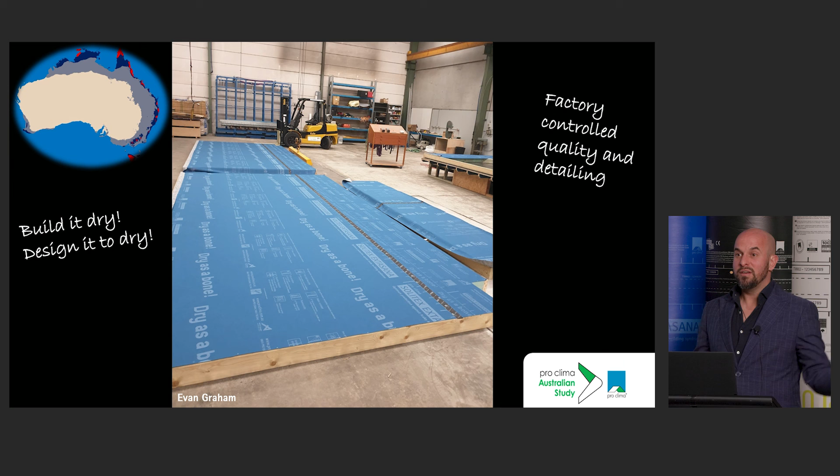It's dry. Membrane on - it's dry. You fill it up with insulation - still dry. You flip it around, put the interlayer on, and the whole system is dry. You sort it, store it properly - still dry. Then you go inside and install it, maybe it takes 1 to 1.5 weeks. After about 2 weeks your whole building is set up at the latest, and it's dry. If rain is coming, you don't care about wind normally, but you just put a massive tarp over to protect your building structure, because there's nothing worse in prefab systems than drowning them in water.

The same is true with CLT - always protect your CLT from day one. If you leave your CLT exposed to wind and weather, you're going to spend a lot of time eventually, in the worst case removing mold, or need a lot of time sanding off all the watermarks. I know from a few projects happening right now that didn't use temporary protection on the CLT panels, and they have massive mold issues now - and we're not even talking about the tropics.

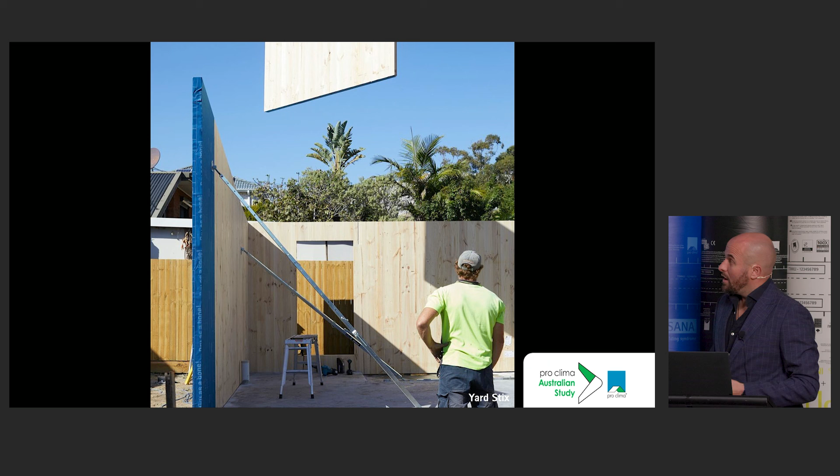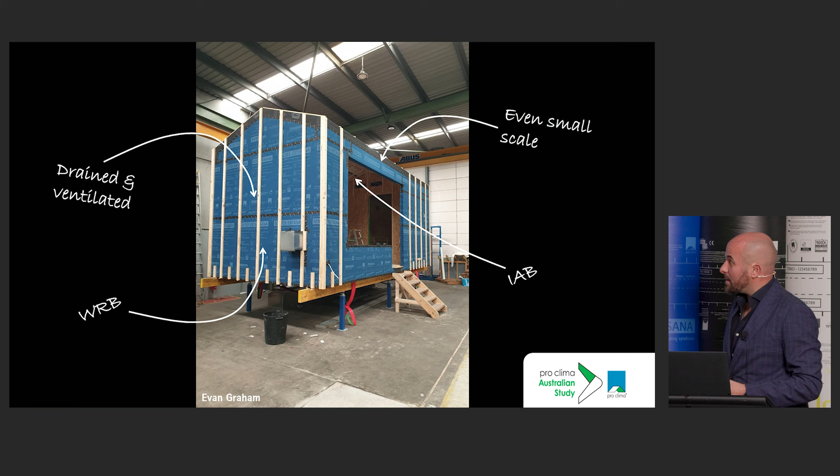Whatever works at big scale works also at small scale. With what he calls a passive pod - you always want a dedicated weather resistive barrier layer on the outside, and a drained and ventilated structure for your building to dry out. Even more important, you need a dedicated airtightness layer on the inside, because the building is significantly smaller, so you have much more moisture on a small area. So the principles, whether you build big or small, are always the same.

So how would we sum it up? We need quality products, quality design, and quality workmanship. When everything comes together hand in hand, we get a quality outcome for a proper build. If you have some questions, we can talk about it and go into detail. That's from my end.